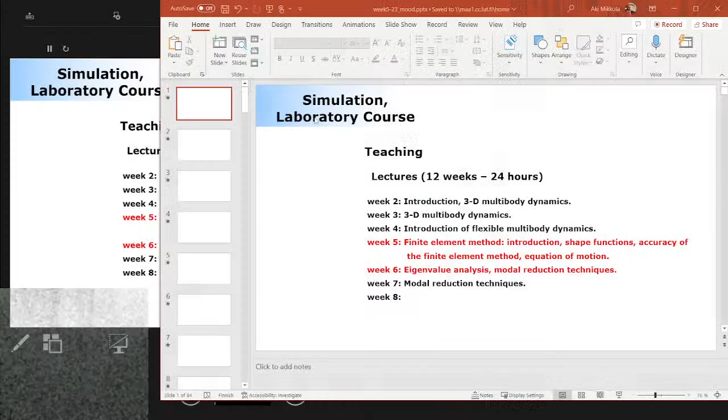This one. And then the presentation mode, like this. Correct, it's beautiful. And the writing and everything is okay.

Okay, what about sound? 5 second latency. No, it's okay, I think it is. What? It was there, it was there just a little while ago. Okay, this one. Look at this. No, I think it looks okay. I think it is okay.

So if you've been wondering why my face is so big, that's simply because I lost this extension cable between my computer and the camera. So that's why the camera needs to be so close to me. So my apology, my apology that my face is too big.

Yep, like this. Okay, what's going to happen today is that we will get started by explaining what's going to happen next week, because next week is a special week, an exam week. So we have a midterm exam, and how the midterm exam will be organized.

That's where we're going to get started. Because Mustafa and Suraj are such pleasant guys - I'm not, but these guys are so nice - they proposed to me that we be relaxed and try to serve our students as well as possible, and make this exam open for a full week's time. I was very much against it, like no, no, no, I don't want that. I want an oral exam in one particular time. I want to make your life miserable and all that.

But they fought back, and eventually they convinced me to have a written exam open for a full week. That's going to be next week. You have 5 questions, and each of the questions you already know, since those are the ones introduced in the slides. There will be nothing outside of those questions that I already mentioned.

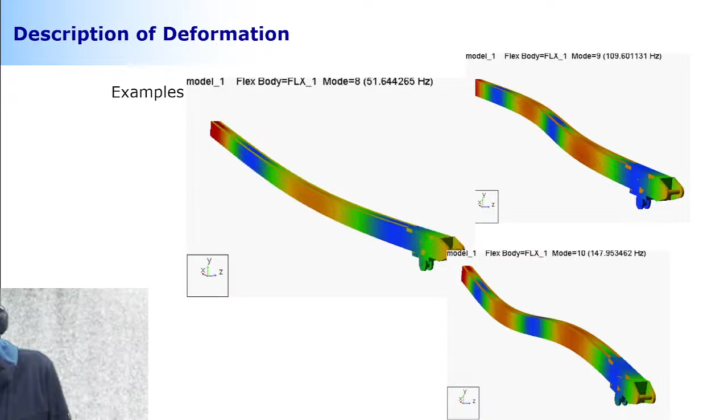And what are those questions? Okay, now I need to scroll down seriously. You need to close your eyes because you are not allowed to see what's happened in class quizzes and so on and so forth. Don't look, don't look. Close your eyes. Close your eyes. No, they cannot.

Okay, there. The online exam consists of 5 questions. Out of a total of 20 something questions, 5 will be randomly selected for you. So if you're following what your fellow student is doing, you will not possibly get the same questions. It's lottery based, and you never know.

But the way you can practice for this exam is to please take a look at all the questions. And there is this instruction that some of these questions are more important than others.

So we will, yeah, see you later Mustafa, so we will try to emphasize those more important ones. The chances that you will see those more important questions will be higher than the lower ranked ones. But be prepared to answer all the questions because you never know how the lottery goes in your case.

So you have 2 hours time. What do you think, is 2 hours enough? What do you think, Suraj? So it could be 3 hours. Yeah, we can make it 3 hours. 3 hours, okay, 3 hours, and then that's it.

You have a full week's time to do it, so it will be open Monday morning at 0:05, and it will be closed on Sunday just before midnight. I think it is a high risk to start doing the exam just before midnight, so make sure you have at least 3 hours.

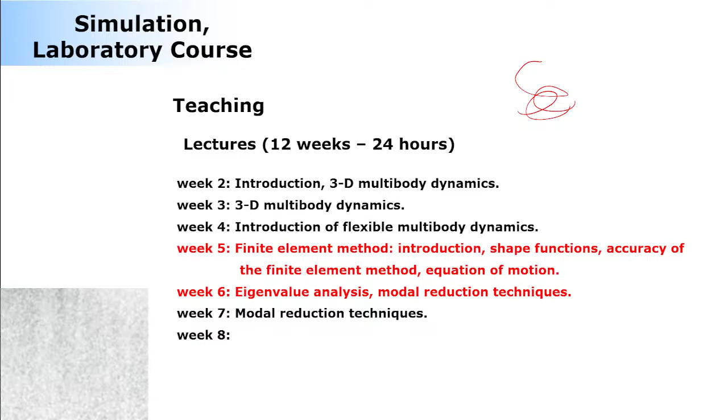I'm going to close the explanation about finite element modeling—thank you, Suraj—and I just need to see the comments from the online participants. Okay, no real comments.

So we're going to close the case about finite element modeling, and then start looking at ways we can reduce the size of a finite element model. That will be based on modal reduction, moving from one space, called nodal space or nodal degrees of freedom, to another space called modal degrees of freedom.

Can you recognize the difference? Nodal, modal. Because I have an accent, so maybe it's not so clear. Can you recognize nodal, modal? Because they're completely different story.

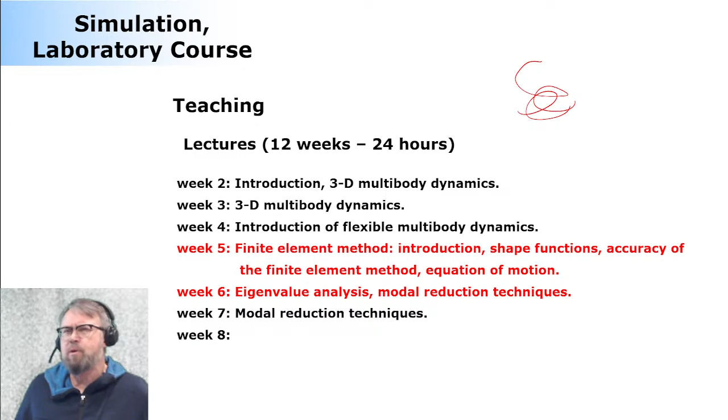All right, and that is related to this eigenvalue analysis and modal reduction technique. It's something that is a really, really important piece of information that I would like to explain to you.

But prior to that, what we looked at a week ago was three-dimensional multi-body system dynamics. We discussed the inertia forces that consist of a mass matrix and quadratic velocity vector. And something we found useful was that the inertia tensor, that is this guy here,

can be mapped to any rotational parameters you want by using this magic T matrix. So even if you decided to use 4 rotational parameters, that's okay. There's no need to express the inertia properties using these 4 parameters, but you can use a body reference coordinate system, and that's what helps your life a lot. Once you get the inertia tensor, that can be mapped to any set of unknowns you want with help of the T matrix. That's it, that's the message I'd like to deliver.

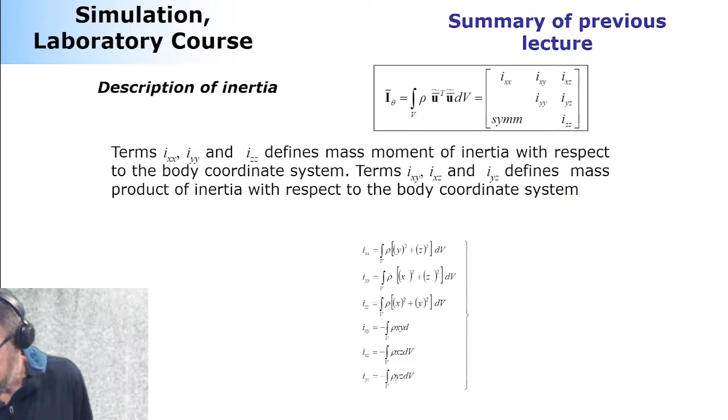And this is the details of the inertia tensor. So mass moment of inertia, mass product of inertia, so not big surprises there.

Okay, all right, so this technique about the lumped mass approach is an extension from rigid bodies. So what you do in this approach is take one single rigid body, divide your rigid body into a number of rigid bodies. Between these rigid bodies, you introduce spring elements. And that's going to be your way to model flexible bodies.

Problem is this numerical stiffness. And numerical stiffness means there are high frequencies and low frequencies simultaneously in one model. Remember what's the problem there?

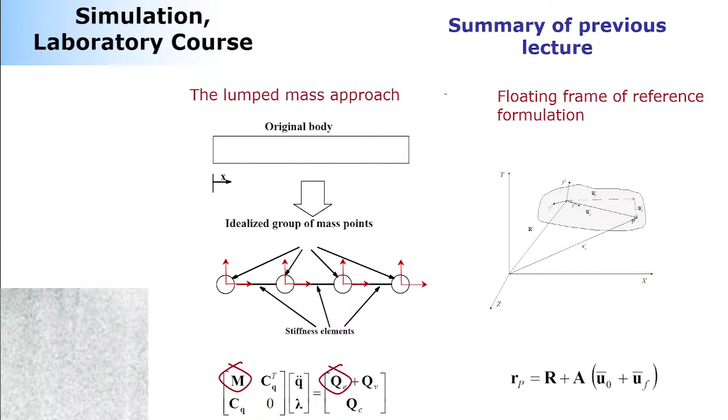The problem is this. Because last time I was unable to make any drawings, so I'm going to make this drawing for you. If you think about that, there is a force with a high frequency acting like this, and the response will be a combination of bending and axial direction. You agree with that?

In the axial direction, the high frequency is much higher than the bending direction, particularly if I make this structure very long and slender like this, all right? And then I'm going to have a component here and a component here.

Now what's going to happen to the response is this. This is time, and this is my response. Let's say this is a displacement u here, which is a combination of x and y, so the response looks like this. But if you take a close look at the response, take this line here, look closely what happens here,

and make a magnification like this back here. You see how I need to make a magnification here because I'm blocking the view. So this is the magnification. You look at the response, it's like this.

High frequencies, which typically are not important for us. But the integration scheme recognizes immediately, hey wait a minute, there's something high frequency happening in my model, and it tunes its steps to make sure it can capture something that we actually don't care about at all. We don't care about this. But the time step will be minimized, will be very small because of this behavior, and then the computation becomes slow. That's a problem, and that's where you have this.

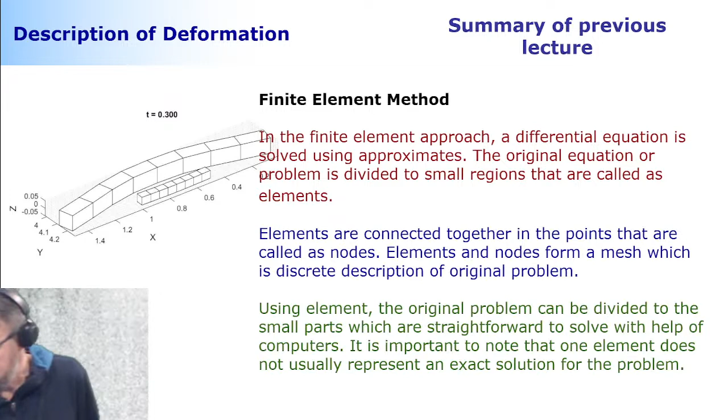Well, easiest, it can be estimated by using a polynomial expansion. Polynomial, which is based on the number of degrees of freedom and the type of element you're dealing with. Now we'll look at this funny spring element. This is very much in motion.

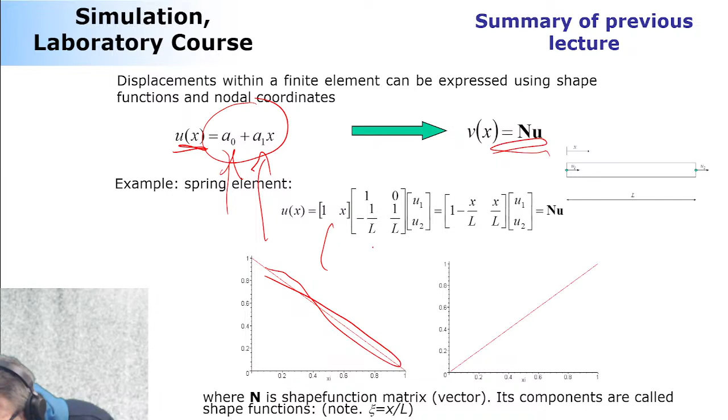Now, what it means in the case of this spring element is that if you introduce displacement to one end, the other node follows using this linear path, linear curve. This is not very illustrative because it's a kind of planar representation - even this is a line representation. But let's say that if originally your element has this length and you compress it to this length, this tells you how the particles between the endpoints are moving. That's what it's doing for you.

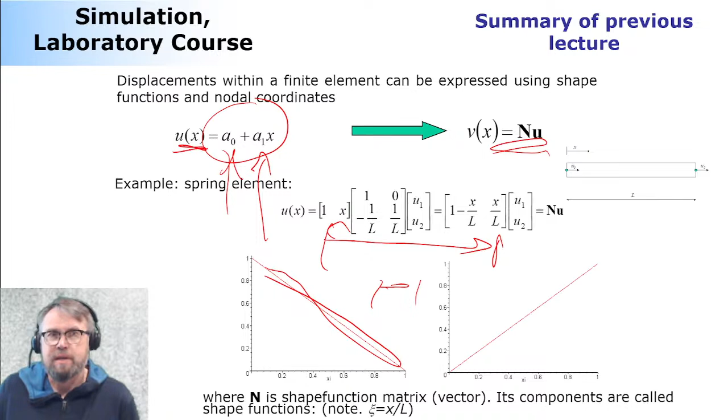All right, and then using this information, we can construct a stiffness matrix, and that came with the help of this kinematic matrix that defines the relationship between strain and displacement. And that's it - very mechanical. The rest is very mechanical. Only thing where you need to do a little bit of thinking is the polynomial expansion. Everything after that is mechanical - nothing else, no thinking, just doing.

And then we can get the stiffness matrix and external applied forces. So this is elastic forces, stiffness multiplied by displacement. And this is externally applied forces that is divided into nodal degrees of freedom, because force needs to be expressed in terms of nodal degrees of freedom. Why? Because in this equation, the unknowns are nodal degrees of freedom, so you need to make them match.

Of course, in reality, they could be distributed forces, and distributed forces are accounted for by using these volume integrals and shape functions, how the forces are divided.

Now, what we do in finite element modeling is solve this by inverting the stiffness matrix and multiplying external applied forces with the inverted stiffness matrix. Then we can get these displacements, but because we also have these shape functions, we can tell how each point of the structure is behaving, how they are moving, how is their displacement. But typically, only nodal degrees of freedom are displayed.

But when you think about the stresses, when you print out the stresses and strains, you actually need to know each particle in your system. And that's when you're using, again, these shape function matrices. Okay, that's it.

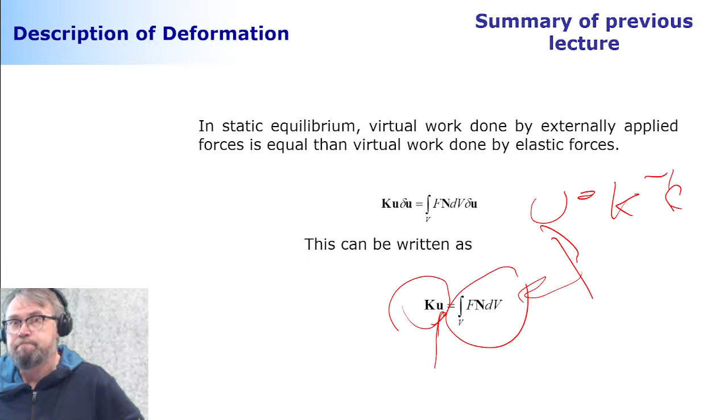Pretty clear. Okay, let's take a look at another example. So I have here a beam element. Now, the beam element consists of a total of 4 degrees of freedom. And now I'm looking at the displacement only in the transverse direction - only displacement in the v direction, this direction, nothing else.

I have degrees of freedom such that at this point there is a displacement in the global y direction, the v direction, that is noted here. Then there is a rotation at the same point, and same degrees of freedom at the other end. So a total of 4 degrees of freedom.

4 degrees of freedom. And now, because it's all about how the displacement is in this transverse direction, I can use a polynomial expansion with the 4 unknowns.

How can I select it? I'm going to go back to Pascal's triangle, and I'm going to select the components in a way that I take this A0, A1, and the rest I can select however I want. I can take it in a line, or I can skip some of them and make a non-conforming element.

That's all possible. But you just need to know that the used element is still converging, because some of these non-conforming elements are not converging to the right solution, which makes them have no use then, of course. Okay, now this is all about the center line.

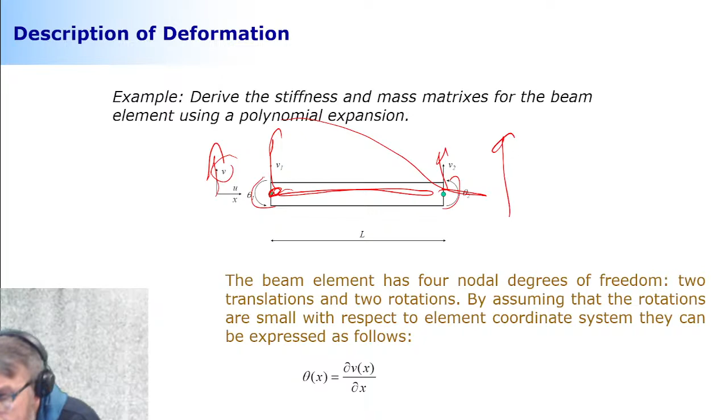So we're describing the center line all the time. But at the same time, we also know how each of the particles that are off from the center line are behaving. So if I have the center line here, I always know that particles off from the center line will be perpendicular to the center line.

And this is the type of element that is called the Bernoulli beam element. The Bernoulli beam element is unable to take transverse shear deformation into account. Transverse shear deformation is somewhat important, particularly if you have thick structures that you would like to analyze. And this assumption that the cross-section always remains perpendicular is unable to capture the transverse shear deformation.

You know this story already. Okay, meaning that if I have here a cross section, it's again perpendicular. The further off I go across this center line, the more bending strain I'm going to get. So my bending and transverse deformation are combined like this.

So they are simple, like a partial differentiation. It's telling you what the angle is here. And the angle is like this tangential angle here. And something perpendicular to that is the cross section. Simple, like this. Okay? All right, so here's my polynomial expansion.

I have here a0 all the way to a3, and a3 is multiplied by x power 3. Look what I did: I took this directly from Pascal's triangle with no skipping. I took each of the components as they are in Pascal's triangle.

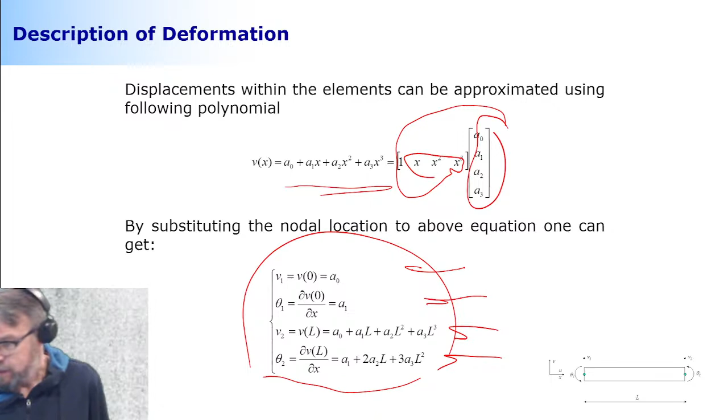So once I introduce this information, I get a total of 4 equations. How many unknowns do I have? 4. So this is solvable. So I can extract the information like this.

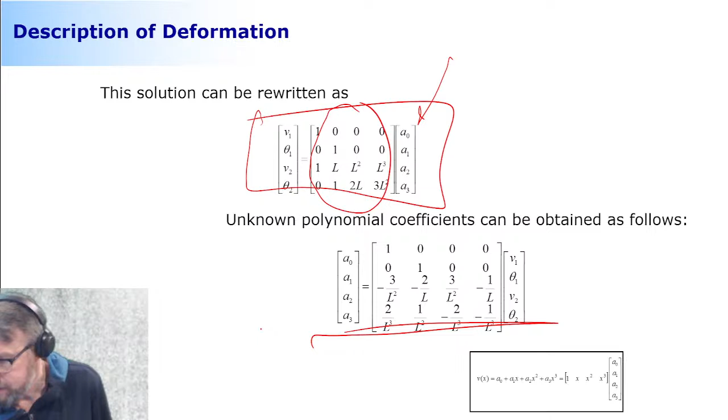This is the previous equation, but this time expressed using matrices and vectors, right? I'm going to take this guy in the middle, invert it, and I can solve this. And that's exactly what I did here. And the final thing is the substitution, after which this is how the shape functions look like.

Now the shape functions have this special feature that they are orthogonal. That means they are not a combination of each other, but they are independent bodies. Independent bodies in a way that if I take a look at this shape function, it's representing what happens if I introduce the displacement in the y direction.

You know, look at that. So I'm introducing the displacement in the y direction. Keep in mind what the rest of the 3 degrees of freedom are. There's rotation, and rotation here is 0. Displacement here is 0, as is the rotation. So no other degree of freedom is imposed or non-zero, other than the one where the shape function is affecting you. Nothing else.

So we're okay, very good, very good. I wasn't sure, but we are okay. You're with me? Okay, good.

All right, and then this is a rotation. So when I introduce the rotation, displacement here is 0, rotation here is 0, as is the displacement. And same for the other end. So that's how it goes.

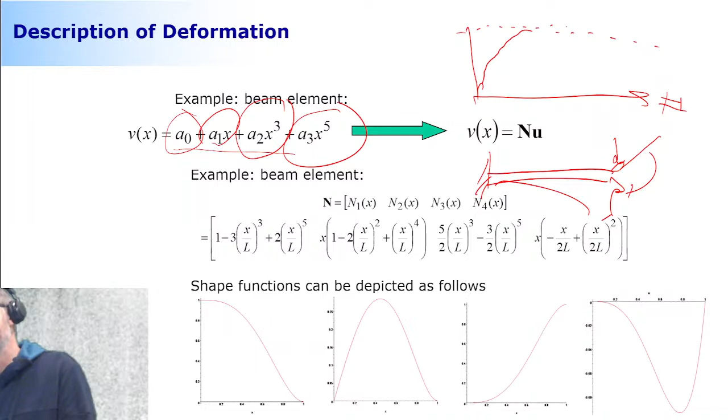This is an inherent feature of the finite element method: you're getting closer and closer to the actual solution, but never necessarily a one-to-one match. So when you look at the 10th digit, that may be a little off, but who cares? What difference does it make? It makes no difference. So it's not necessarily absolutely correct, but it's a very, very good estimation. That's the nature of the finite element method. And you get a better estimation with more elements. How fast you can get the good estimation is called convergence rate.

Good convergence rate means that a low number of elements is able to produce very accurate results. And why is this important? Because then you can save some computational power.

Okay, this is off topic, and I don't know why I'm explaining this to you, but I still will. In the finite element community, this displacement-based finite element community, what we're looking at the moment, the unknowns are displacement. There are many other types of finite elements where the unknowns are not displacement, but pressures or something else, which we are not going to take a look at here. But for this displacement-based finite element method, there are two ways we can do this convergence.

We can either improve or increase the number of elements, like I explained. You put more smaller and smaller elements to fill the same structure, and you get better and better solution. Or you can increase the order of your element. The order of the element means you're adding maybe internal nodes to your element, adding more complicated degrees of freedom to your structure.

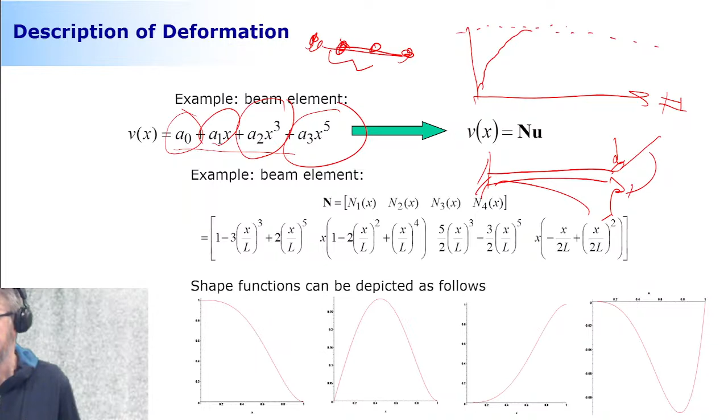HP refinement has two alternatives: increasing the number of elements, or increasing the complexity within the elements. Usually, when you use a commercial finite element method, it's all about increasing the number of elements. But now you know there is this alternative, so you can show off next time you discuss with... I don't know.

So for comparison's sake, this is how they look different - these are the shape functions. Again, finite element method is all about this: nothing but how the behavior is between the nodes, nothing else. Once we know the behavior between the nodes, using this mechanical computing, we can get the stiffness matrix and the mass matrix. Makes sense?

Comments, questions? All makes sense, always. So you knew this already a million years ago, more or less. Okay, what about our finite element people? You were aware of these P and H refinements. You knew that too. You knew that too. You're lying, you knew that.

More or less, okay, very nice, very nice. What about the mixed finite element, when there's displacement and pressures simultaneously as unknowns? Yes, sir. Correct. Newton method or Gaussian elimination method? So where exactly - I think at where you're using this nodal matrices, or so, what exactly do you do with your Newton method?

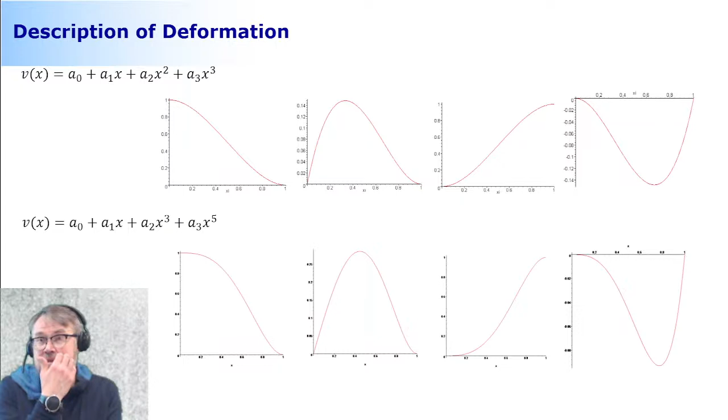Because lump masses never introduce rotational degrees of freedom. That needs further explanation, but rotational degrees of freedom are ignored. That's why when you use lump masses with beam elements, they're in a straight line - they don't have rotational inertia. So if you take hold of this beam structure and rotate it like this, it's going to go crazy because there's missing inertia. The spinning speed will be velocity of light, which is not realistic, simply because it's missing rotational inertia. So rotational degrees of freedom are ignored.

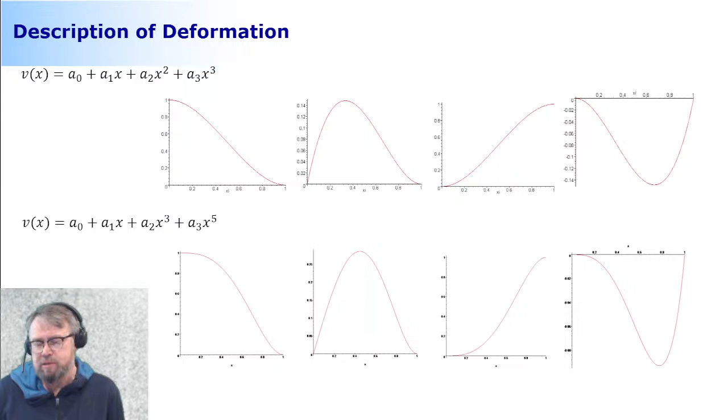But this is a translational degrees of freedom - you are not introducing any inertia whatsoever in that method. But there are other ways, alternatives to express it. So that's why.

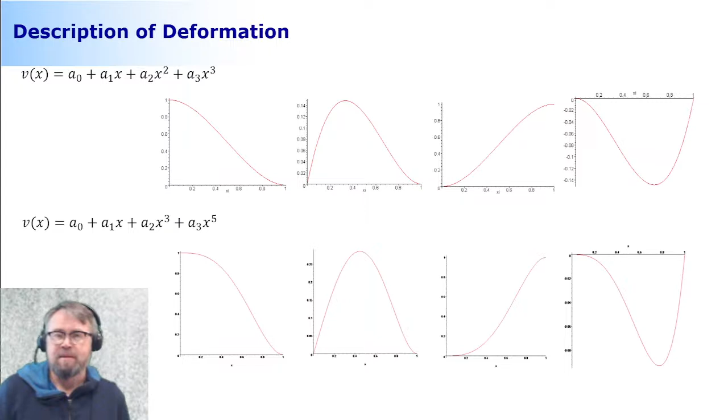You know that's a joke we have - B defines the strain displacement relationship. No clear interpretation - is it on or is it not yet on? It's on. Okay, very good. So we'll get back to that momentarily.

You see the in-class quiz. Team Malaysia voting for... no votes. You passed the vote. We're voting because this is ultra democracy in this classroom - we're all forced to vote. D, meaning no clear interpretation. So Team Malaysia thinks no clear interpretation. All right, we're moving on, and I'll get back to that momentarily.

Okay, now a short story - I'm going to speed up a bit because, as I said, the finite-element method is all about these polynomials. The rest is mechanical. We're going to find a relation between the displacement outside of this midline, and that, of course, is this cross section and how far off you go from the cross section. That's why the y is there. Further off you go from the cross section, the bigger your displacement.

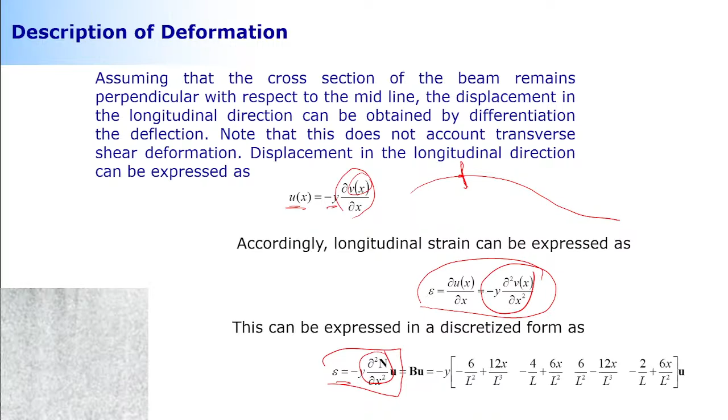Using this information, I can take my previous slide and substitute that here, and that's how I get this equation - this is my strain-displacement relationship. But again, no thinking needed really, because this is very mechanical. Now you get this B, which is a kinematic matrix, and once you have a kinematic matrix, you can get the stiffness matrix. Please do not think, just do it.

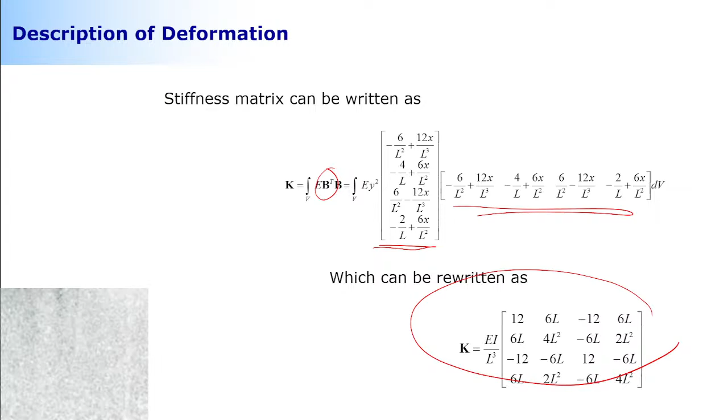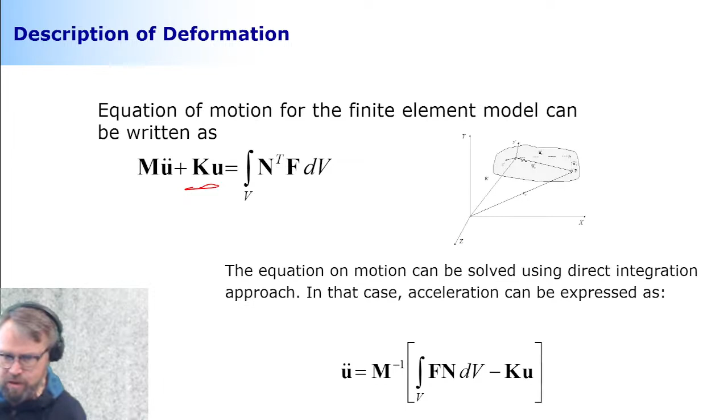All right, remember where we started. We started from the polynomial expansion, so then we were able to get the stiffness matrix and the mass matrix. Once we have the entire structure, we can combine these element stiffness matrices into a system stiffness matrix. This is something I need to show you a slide next week, how you do it, but basically you're overlapping your degrees of freedom in your system stiffness matrix. If you have two spring elements, this is element number 1, this is element number 2, each has a 2x2 stiffness matrix.

This system consists of 3 degrees of freedom. So how can you construct, from this 2x2 and this 2x2, the system matrix that is 3x3? By overlapping them. There will be a submatrix which is 2x2, and another submatrix which is 2x2, and they're overlapping here, sharing the degrees of freedom in the location that they're actually sharing them in physical life too. These components will be summing up, and that's how you construct the entire stiffness matrix for your system.

Remember what we did in multi-body system dynamics was a block diagonal representation. It was like if there would be a 2x2 matrix, then another 2x2 matrix constructed in a way that they never share any degrees of freedom whatsoever, just a block diagonal representation. Here, they are overlapping, and because of this overlapping, I have this one joint node shared between element 1 and element 2. That's how the finite element method works.

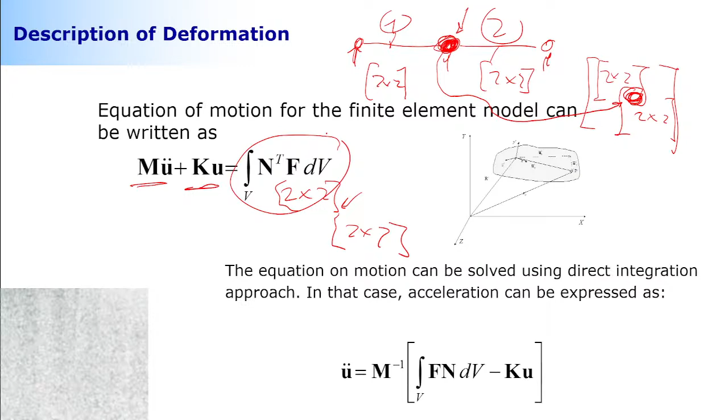You can do the same for the stiffness matrix, and this is how you extract your external applied forces. Now you're ready - this is your equation of motion for a flexible body described using the finite element method. What you can do then is solve for acceleration, as shown here, and then you integrate acceleration to get velocity, and integrate velocity to get position. That's what we were after, okay?

But there is a big problem here. The typical finite element model consists of thousands, tens of thousands, hundreds of thousands of degrees of freedom. That's not good because this equation needs to be solved every single time step, and the time step we're using in multi-body system dynamics is a millisecond or 10 milliseconds - sometimes 10, but often 1 millisecond. That's too much computing, so we just cannot do that. We need to do something else, and we need to reduce the size of our finite element problem by moving from nodal degrees of freedom to modal degrees of freedom.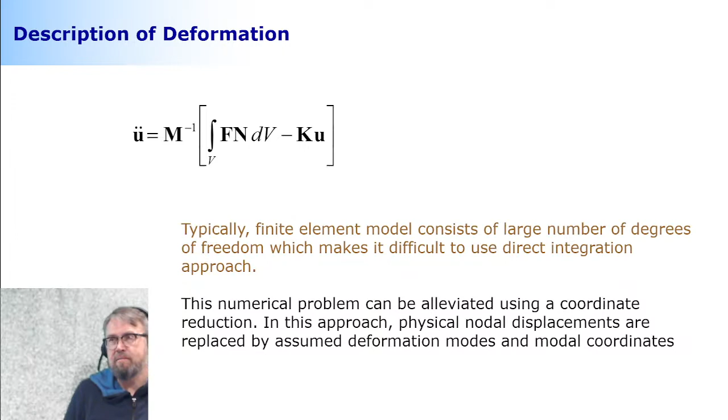Here's the same story explained. This is not the good way to go because it's too much computing for us, particularly when we look at the reference motion, rigid body motion - if we cut corners, it's described by using 6 variables. Now suddenly we have 6 plus 100,000; they don't match, they don't get along. One is too big, and we need to make it smaller - that's going to be our mission. So our mission is to make the finite element model smaller, to make it comparable with the 6 unknowns we're using in multi-body system dynamics, 3 unknowns if it's a planar case.

And what we're going to do is this magic: we're moving from one space to another space, and something that comes with phi is assumed deformation modes. So we are assuming not just one element anymore, but the entire structure's behavior, expressed by using this matrix here. So the matrix consists of columns.

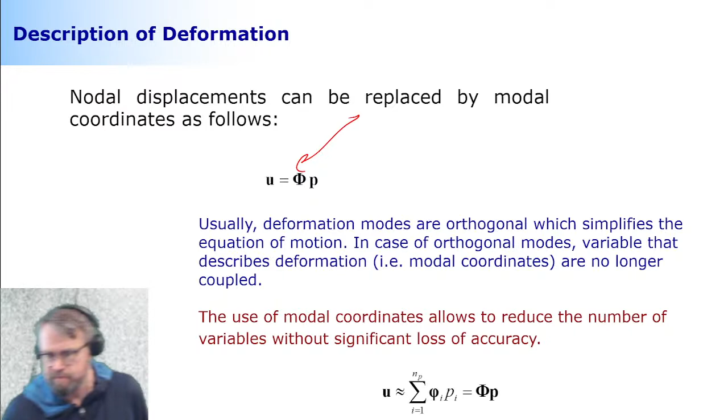Each of these columns represents numerically one possible deformation way. One possible deformation, which is not a single element, but each of the nodal degrees of freedom, each of the elements in your system, meaning the entire structure. How much that is affecting your solution, this deformation mode, that's going to be our new unknown, which is called modal coordinates. I'm going to explain this again in a second. A finite element model consisting of 10 degrees of freedom means there are 10 different ways that the finite element model can deform. All right? So those are the different ways.

If we keep all these ways in our computing, we lose nothing. But some of these ways may not be important for us, particularly if you think about a finite element model that consists of 100,000 degrees of freedom. How many different ways can the structure deform then? That's 100,000. Maybe not all of these 100,000 ways is equally important, but some of them are more important than others.

And now we just need to find the king. We need to find the king and the queen. Once we know the king and the queen and their child, their family, we need to look at them and leave the rest of the crowd with no attention. That's not democracy, this is ultra opposite to democracy. Okay, you're following my reasoning here. So we need to find the most valuable ones and leave the rest with no attention whatsoever. We actually kick them out from the game. When we kick them out from the game, we've reduced the problem size. Okay, that's what we're going to do.

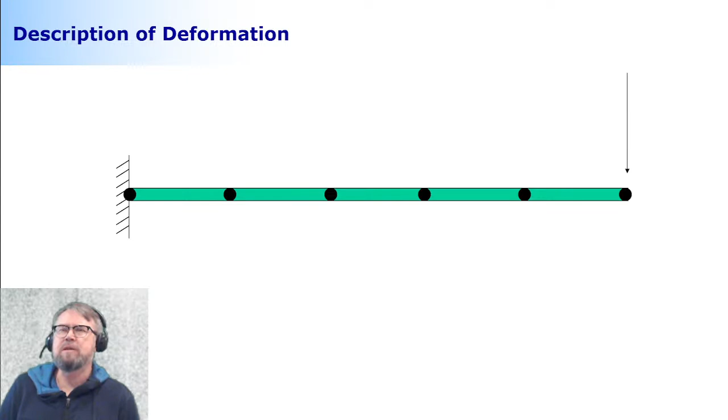Let me try to explain this whole story about the modal degrees of freedom one more time. This is a cantilever structure, and this cantilever structure is modeled using these finite element beam elements that we looked at a little while ago. So each of these nodes that are black in color consist of 2 degrees of freedom. This is 2 degrees of freedom in the sense that there is a displacement in this direction and rotation, except that there is not. And why not?

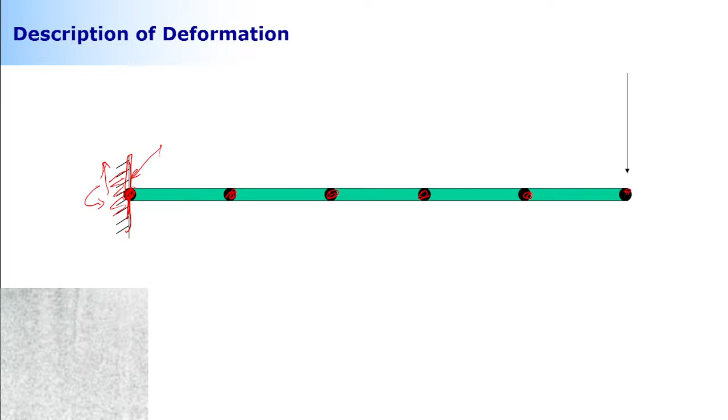Because this node is here connected to ground, so the degrees of freedom are taken away. So this is not a possible deformation. But then comes next: this guy has a deformation in this direction and rotation, as does this one, and this one, and this one. So there's 1, 2, 3, 4, 5 nodes, other than the boundary nodes. Each of them has 2 degrees of freedom. So how many degrees of freedom in total? 10. 10 degrees of freedom.

10 degrees of freedom, and each of these 10 degrees of freedom means something. They mean how one single point within the structure will deform. All right? How can we get these 10 unknowns—we can get these by solving the finite element solution, a static solution like this. So these 10 unknowns are these guys, these nodes. All right? So we're solving this equation by inverting the stiffness matrix. So we get each of these points, how they are performing, how they are moving and translating. So it's going to look something like this.

All right. What we can do, instead of looking at these points—and now we really get these 10 unknowns, so this vector will consist of 10 components—what we could do instead is make an assumption that most probably the way the structure can deform will be the lowest, how it is rotating or vibrating in this lowest natural frequency. In the lowest natural frequency, it is deforming like this, something like this, something like that. But how much like that? I don't know.

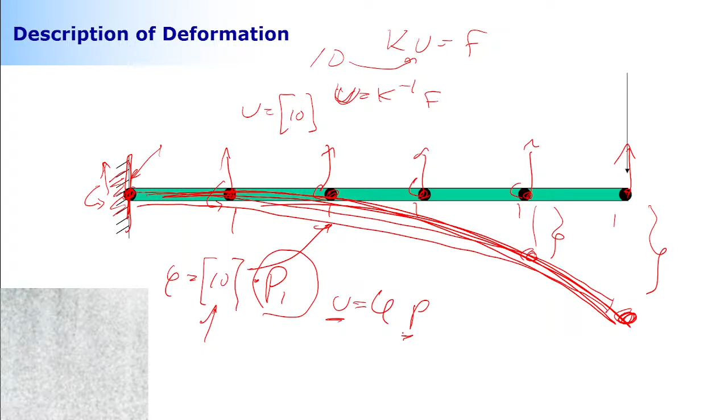If I put it like this: one deformation mode multiplied by one amplification, that's going to give the vector of nodal degrees of freedom. So I can move from nodal degrees of freedom, or nodal space, to modal space with the help of the assumed deformation mode. That's what I'm going to do.

So later I can use these as my unknowns. Now if I look at my structure, I can have 10 of these. This was ID number 1, this is ID number 2, it goes all the way to ID number 10. But maybe this 10 is something I can ignore without significant loss of accuracy.

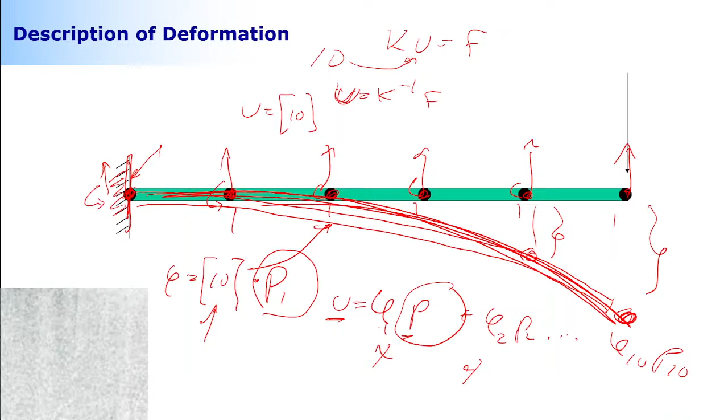That's exactly what I'm about to do here. I'm going to select the ones contributing the most, the most valuable players - that's what they call it in NHL. So I'm picking up the most valuable players from each of the teams, and ignoring the rest. I don't care about the rest. Okay, that's what I'm doing.

How can I get these deformation modes? I can get these deformation modes from an eigenvalue analysis. Eigenvalue analysis is not an absolute value, but a way the structure can deform. It is highlighting the ways the structure can deform, nothing else.

How can I conduct an eigenvalue analysis for a finite element model? Well, first I need to ignore external applied forces, because this is not about the responses. This is about an inherent feature of the structure, not a response. A feature, not a response. Okay?

You know that eigenvalue is all about the relation between stiffness and mass. Stiffness and mass - those are the two pieces of information I have here: my inertial forces and my elastic forces, my mass and stiffness. Now, for the math, I know that the solution for this problem can be expressed like this.

I don't know where the heck this is coming from, and I'm not planning to find it out for you. But if you want to go through it yourself, you can see where it comes from. This is the Euler method. This is what you learned at bachelor level. So this is the solution for this problem.

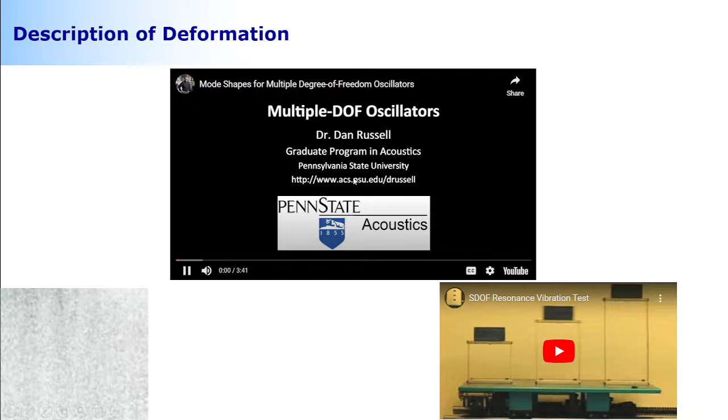Okay, let's take a look at the animations and then we get back to this. You know these stories, these YouTube videos about simply supported beams. A one degree of freedom system.

So in the one degree of freedom system, how many natural frequencies are you going to find? One. How many corresponding deformation modes? One. So it's like this, simple like this: one deformation mode, one frequency. If you have two masses, how many frequencies are you going to find? Two. How many different modes? Two. This is your two-degree-of-freedom system.

This is the first way it can deform. The second way it can deform will be shown momentarily. Where is it now? This is a slow video.

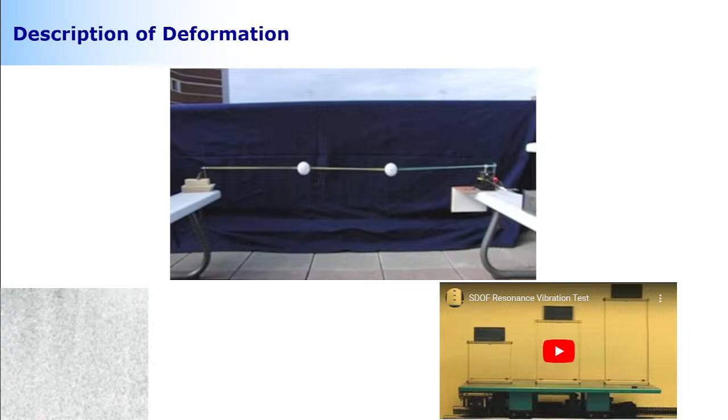Okay, 3 degrees of freedom, how many different ways can it deform? Not 5, that's incorrect. Israel, you said 5, it's not 5. It's 3, of course. Sorry for making jokes about you.

Okay, so 3, this is the first way. How many other ways? 2 more ways. Simple, like this. And this is the natural frequency.

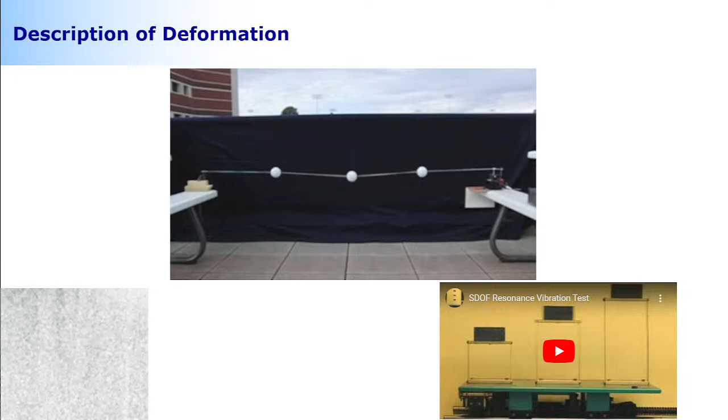That means that if you excite your structure using the same frequency, the natural frequency, your structure will go crazy. It will start vibrating like no limit, but there will be a limit. Like every system, they have a physical limit, but mathematically the response will go to infinite in the longer time perspective. So it's going to vibrate to the moon and back, and then soon it's going to be more. But that's not going to happen in real life because there are always some limitations. These are the natural frequencies.

So the structure is moving such that I'm increasing the motion of the platform slowly. What's going to happen first is that the structure that is the most slender, the one on the right side, started to vibrate because I'm going to hit its natural frequency. And the vibration goes crazy.

Okay, this is a kind of slow video. I guess these are like Feng Shui videos, they're so slow that you can practice your mental strength.

Oh, here, finally. Look at the guy on the right, he's going crazy. No, the one in the middle, I don't know where we are at. No, I think it's still the right side that's going crazy because we're exciting the platform using its natural frequency. Now look at that, so it's going absolutely crazy while the others are moving nowhere because of the natural frequency.

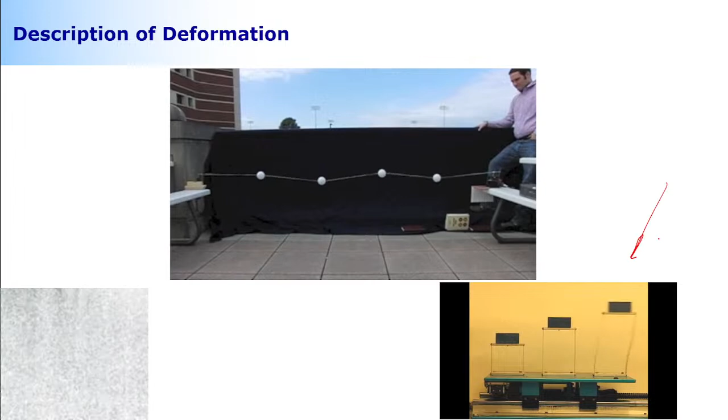That's the eigenvalue analysis, so we can first find it out. No, look at that. So this is the first eigenvalue, then eigenvector. Makes sense.

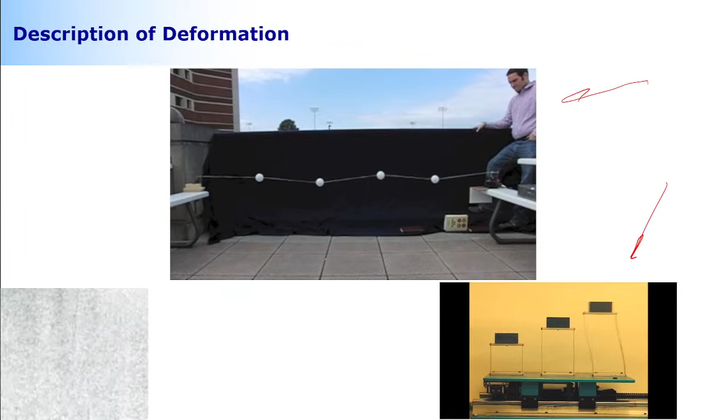All right, so then the second one will go equally crazy, but soon this will calm down because we're going to go away from the natural frequency. Look, so it started to calm down as the second one goes crazy. Okay, and so on and so forth.

So let me take myself back here. Now, this eigenvalue analysis is going to give you an equal amount of eigenvalues and eigenvectors as the number of nodal degrees of freedom, the number of unknowns, not more, not less. In the maximum case, usually you're not really interested in all of them, but the maximum number will be the number of nodal degrees of freedom, unknowns.

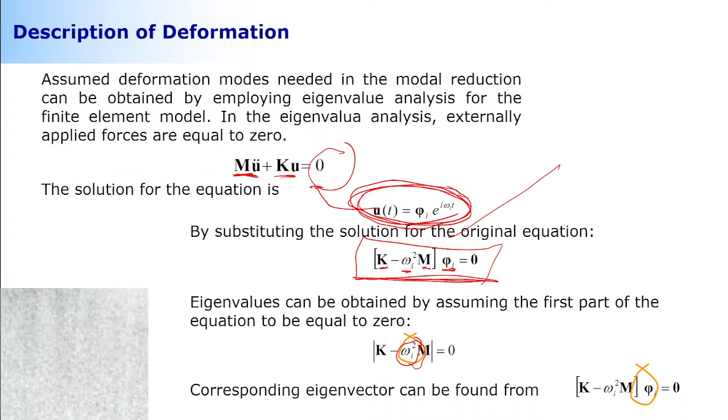Okay, with that, here's my question to you. I have here a finite element model that consists of m number of elements, n degrees of freedom. The model can be used to solve how many eigenvalues, how many different natural frequencies? Is it equal to the number of elements, equal to the number of nodal degrees of freedom? Are these two numbers subtracted from each other, or are these two numbers added to each other? So which one is correct?

What is team Malaysia saying? Okay, team Malaysia is saying B. Okay. So it's not open.

Yep, okay, success rate competition. 18, 80? No, okay, so it is 80%. Oh, I can write this, 80%. I'm guessing 95, 90. Okay, what about 100? No. Okay, the success rate is this one. Very low, very low. Major disappointment.

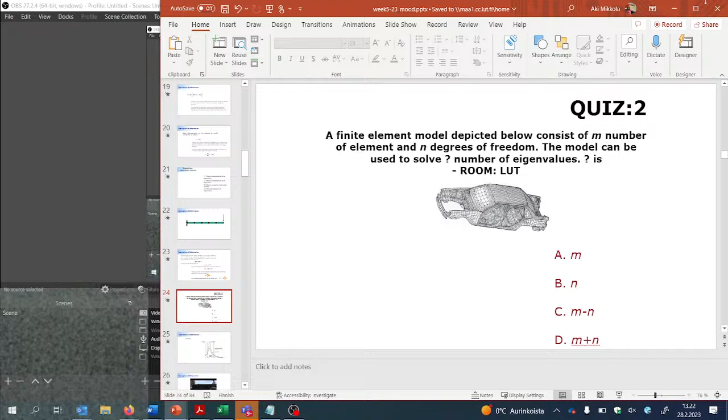Okay, all right. So then, taking myself back here. Oh, now you don't see this. Hold on.

Okay, that looks good. All right, then I need to show you something.

So this is a finite element model describing a tube roll. When we started to look at the natural frequencies and the corresponding deformation modes, the lowest ones look like this - they look like a banana, something obvious.

But soon when we started to look at this one here, pay attention to this frequency - now the frequency is 200 hertz. Most of the modes are still important; they still make a contribution to dynamics.

But as soon as we increase the natural frequency, the deformation modes become more and more exotic. Soon they will be so exotic that their role in the response may not be very important anymore. Of course, we're still in not so high frequencies - we're still at 350 something hertz, so it's not that great yet.

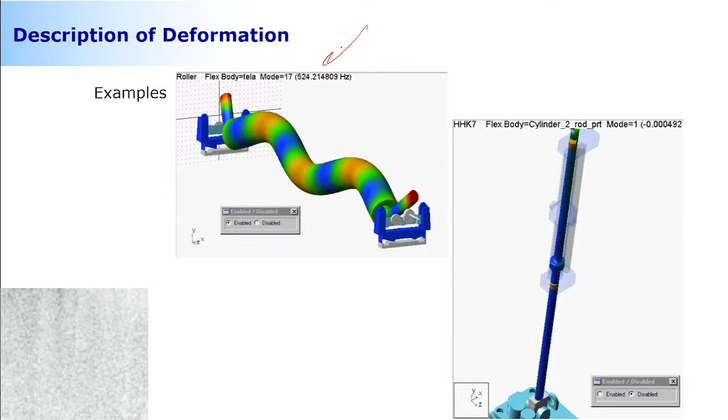But the more we go in this video, the higher frequencies we're going to meet, the more complicated deformation modes we're going to meet, and some of them are no longer important. That's the whole trick about modal reduction. The ones that are very detailed, very exotic, we simply ignore. We simply do not care about these exotic ones - we only want to see the most valuable players and nothing else.

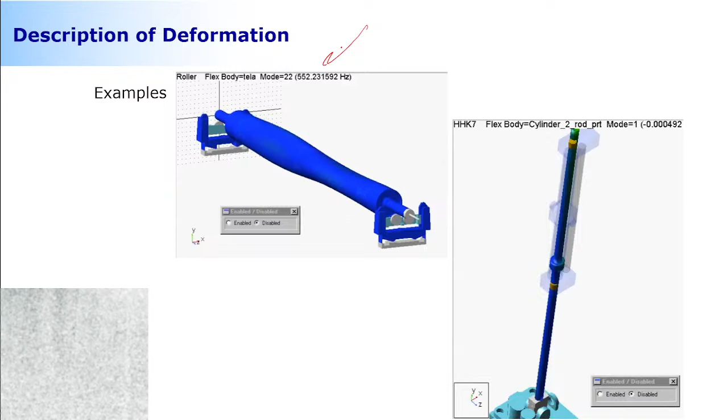This is already disabled, and the frequency becomes 500 hertz. Let me show you even more, something more exotic. These are the simple beam structure modes, which are at low frequencies for sure - they are important, it makes sense to keep this in your model, as is the case of this one.

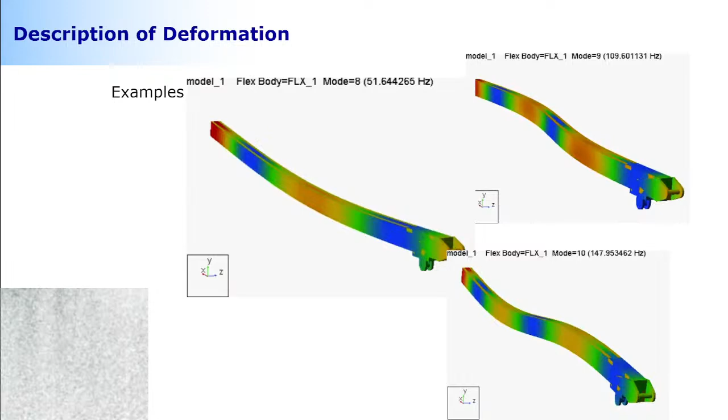And that's exactly what we do in the model reduction method. And then comes something beautiful. Many people, by the way, when they learn this, they start to cry - emotions run so high because this is a big magic in mechanical engineering.

And the big magic is this: these modes that we're looking at - if I'm going to write it like this, plus this, and so on, all the way to n - I'm going to construct a matrix, which is the matrix where these modes are arranged: this is the first row, second row, third row, and so on and so forth.

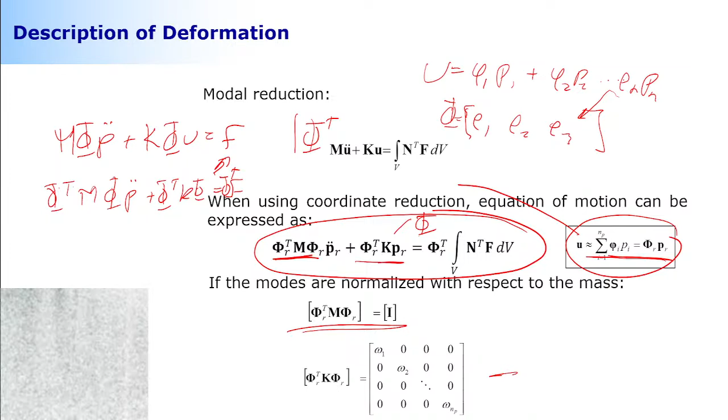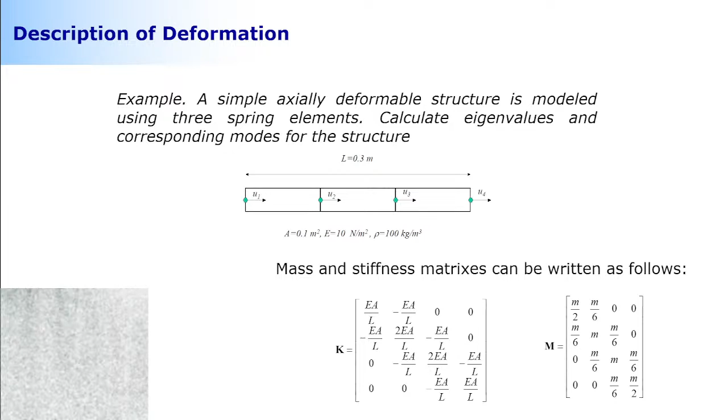Okay, let's practice this. I'm going to conduct an eigenvalue analysis on the structure shown here. This is the famous element we learned a week ago, which is only capable of moving the nodes left and right. I'm modeling the structure that consists of 1, 2, 3 spring elements, and there are 4 nodes: 1, 2, 3, 4. I'm going to conduct an eigenvalue analysis for this structure.

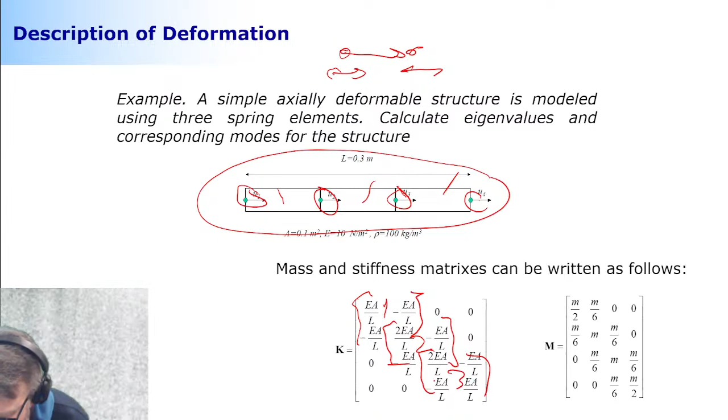First thing to do is take my 2 by 2 matrices and construct them into the system matrix like shown here. This is my first element, my second element which is connected to neighboring elements, and my third element. I'm doing the same for the mass matrix. Now I have the components I need: my mass and my stiffness.

I know that you don't do this in real life, but I wanted to show how you do it if you solve it analytically. In real life, you're using iterative processes like you learned in a finite element class, but I don't do that here because I want to show the exact numbers for you.

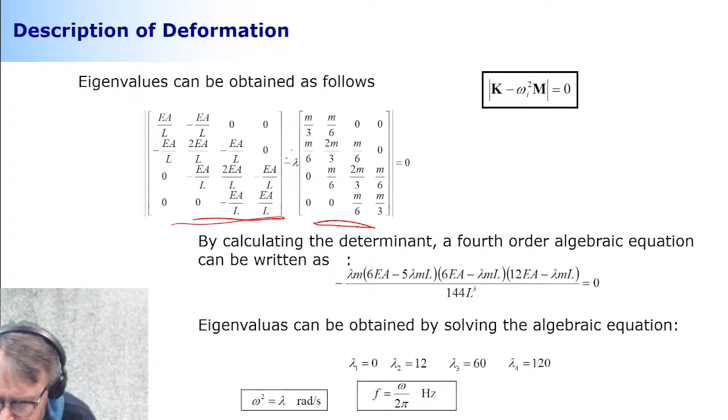Here is my stiffness, this is my mass. And look, this is what I called earlier omega squared, so now it's called lambda. I'm setting this equation equal to 0 and taking the determinant of this part of the equation. When I do that, I get the fourth order polynomial shown here. I know it's fourth order because there's a lambda here multiplied by this one, and this one, so it will be a fourth order polynomial.

I'm using my symbolic math tool to solve where this polynomial goes to 0. It goes to 0 in 4 different places: lambda equal to 0, lambda equal to 12, lambda equal to 60, and lambda equal to 120. These numbers are related to natural frequencies, so these are the natural frequencies of the structure.

Number 0 means what? What does this mean, number 0? Guess, you can guess. It's not vibrating, correct, but what does it look like? It's not vibrating, but seriously, you're saying rigid body mode. I've been asking this every year, year out. People are like, no idea. Never ever do they say rigid body mode. What's wrong with you people? So you said correctly, this is serious, this is very, very serious. How did you know that? Because machine dynamics.

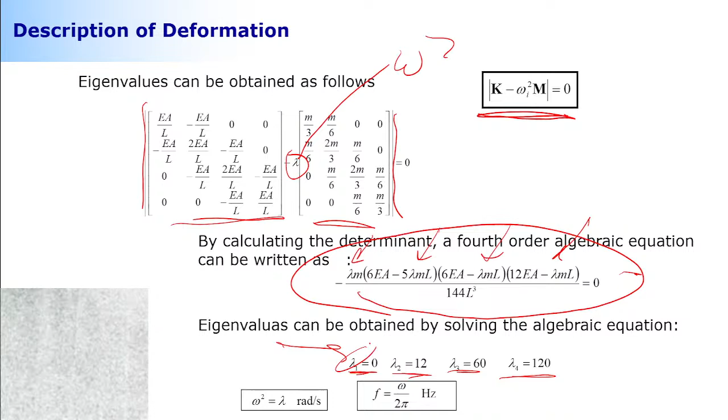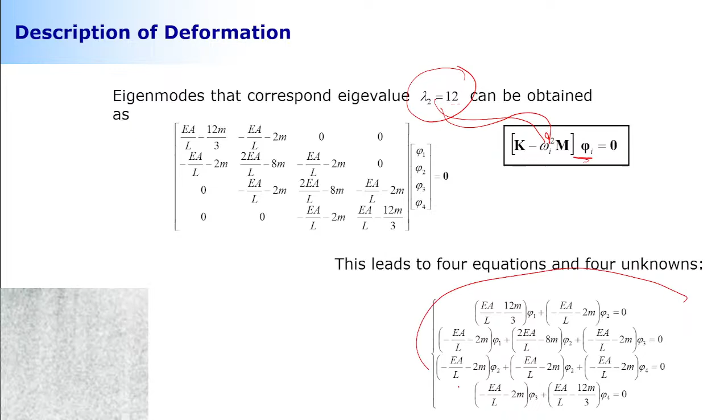What's going to happen next is I'm going to take one at a time of these natural frequencies and substitute them into this equation. I'm going to solve this vector, which is the eigenvector, the way the structure can deform. Lowest is the number 12. You don't need to care what that means. When I substitute the number 12 into this equation, I get this set of equations: 4 equations, 4 unknowns. When I'm solving the unknowns, they look like this.

Now, something extremely important to understand: this is not a response of any kind. Why? Because the equation that I'm solving is this.

This is my equation. To solve the responses, you need to know the feature of the structure, which is this one, and forces. But remember what I did in the beginning, I set the forces to be equal to 0. So I don't care about the forces because I only wanted to see the feature of the structure.

Now this number or this set of numbers can be multiplied by any scalar number you want, anything you want, and still it fulfills the equation. I can multiply this by 10, by 100, 1,000, 10,000, doesn't matter. It's still going to fulfill the equation because this is just the way the structure can deform. And this way can be amplified or not.

This multiplication is called scaling. Scaling means that you want to get your numbers to be as close as 1 as possible, because computers are very good with the number 1 and not as good with other numbers. Of course, they're okay with other numbers, but as soon as the number becomes very small or very large, they start struggling. So scaling is one thing that we can do.

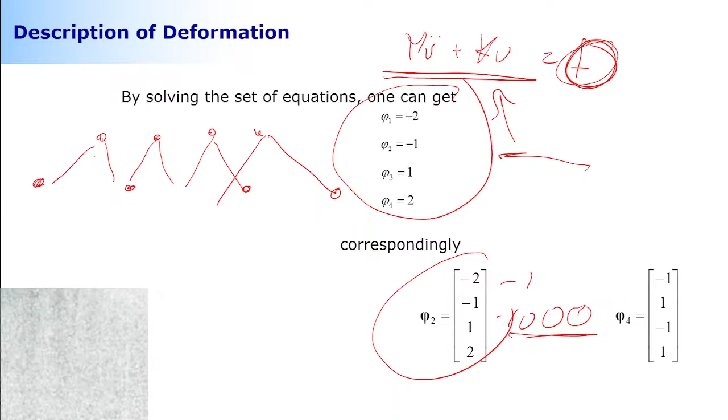Okay, now comes something very important, and I'm putting all my hope in you that you're going to get this correctly. So the physical interpretation of the eigenvector, this deformation mode, is what? Relative displacement of nodal degrees of freedom, meaning they only show the way the structure can deform. Absolute displacement, meaning you can use it in your analysis, you can measure what the response is. Or strain distribution within the structure, no clear interpretation. Only one is correct. Which one?

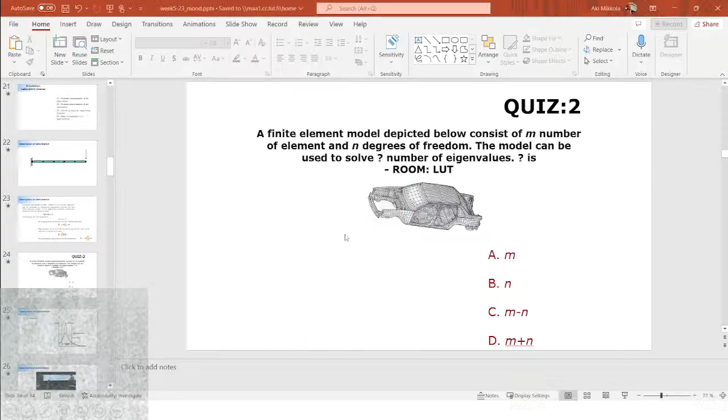And Team Malaysia is thinking heavily. So we're going to learn the solution. I need to go, I need to take myself back in as Socrative.

Where's Socrative here? Okay, now, relative, absolute. Relative, absolute, there's a big difference. Relative is the way the structure can deform. Absolute is something that you can use to measure the displacement and something you can use in your reasoning. Strain distribution: no comments. No clear interpretation: no comments either.

100%, 100%, and it would be beautiful. Okay, 100%, and I'm going to give each of you one extra point in the midterm exam. Correct, you heard me right, you heard me right. So one extra point, okay, now please communicate with your fellow student, please, and revote if needed.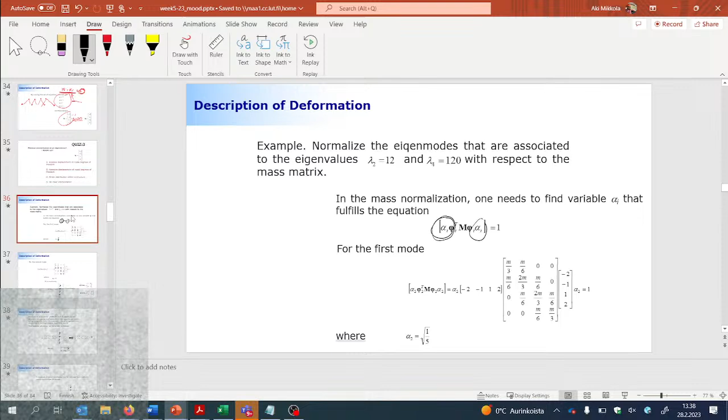And that is something that is called scaling. A better name for that is normalization. A typical normalization is called mass normalization, meaning you want the final mass matrix to become an identity matrix, a matrix where the diagonal components equal 1 and off-diagonal components equal 0. This is scaling, but again, it's something you can multiply these relative numbers by anything you want. So I'm scaling my mass to be a diagonal identity matrix, figuring out what this alpha, this extra multiplication number, must be so the solution is 1.

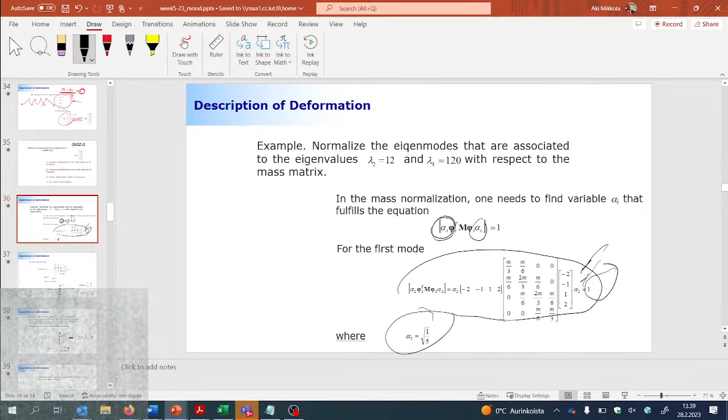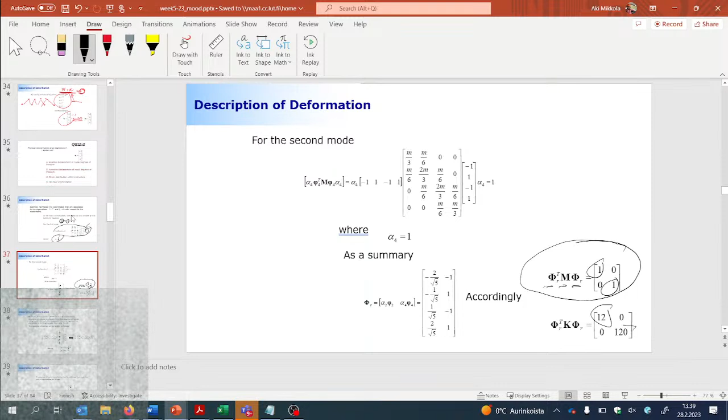So my unknown is this multiplication number, and I can solve it like I showed here, and I can solve it for other numbers too. When I then take my modes multiplied by the original mass matrix multiplied by modes, I'm going to get the identity matrix: the diagonal components are 1s, off-diagonal components are 0. And then when you do that, the eigenvalues appear as diagonal components in your stiffness matrix. That was my last slide.

Then I'm not going to discuss that further, but I'm going to move on to this one. So here's a summary of the questions.

Remember this? Suraj promised that the voting will be on. It's already on. Okay, voted. It's going to be closed, he said, Thursday at midnight. And then we announce how the results are. But this is the stuff.

These are the questions related to kinematics. I'm not going to read them anymore, but there are 11 questions in total, and a little bit about ranking, which makes sense for you to focus on. So the entire kinematics topic is worth 3 stars.

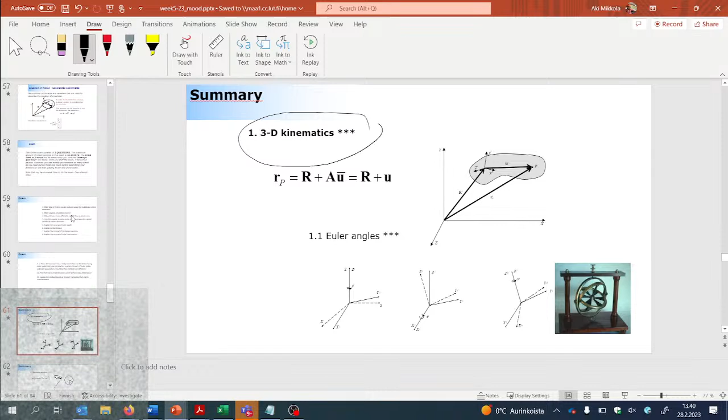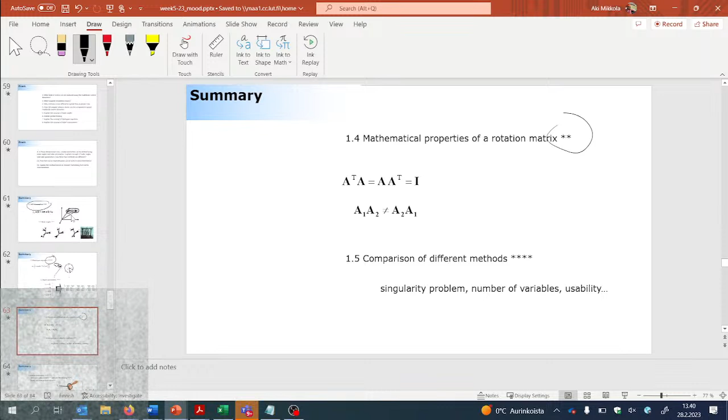Rodrigues equation, 5 stars, but there's not that many questions related to that, so it's not so complicated. Mathematical properties of rotation matrix, just 2 stars. Comparison of different methods, 4 stars. Robot kinematics, 4 stars, of medium importance. Denavit-Hartenberg is something we learned earlier.

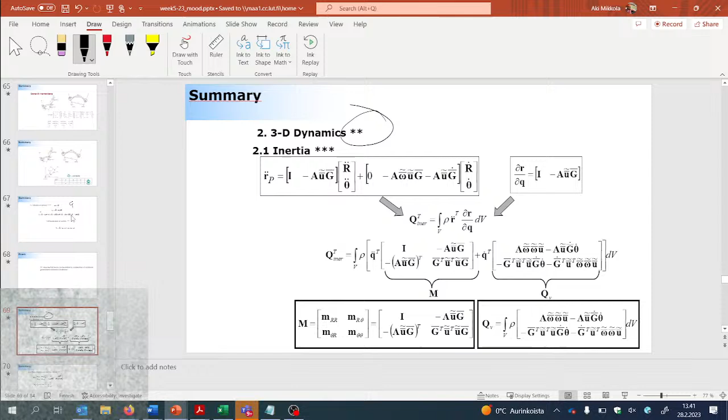Velocity of particle - the only important thing here is this magic T matrix. How the inertia tensor can be related - this is not so important, 2 stars only. Mass matrix and inertia tensor, just 2 stars, so not particularly important. Equation of motion, not important.

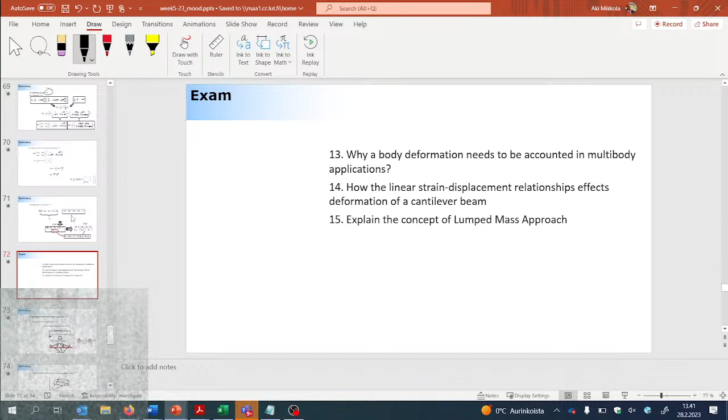But then comes finite element modeling, and finite element modeling is 4 stars. So it is important - make sure you understand the basics of finite element modeling. Floating frame reference formulation, the basics, 4 stars. Finite element method, 4 stars. Shape functions, 5 stars. Solution techniques, 5 stars.

Modal reduction - 10 million stars. So that's very, very important. Modal reduction - make sure you master that.

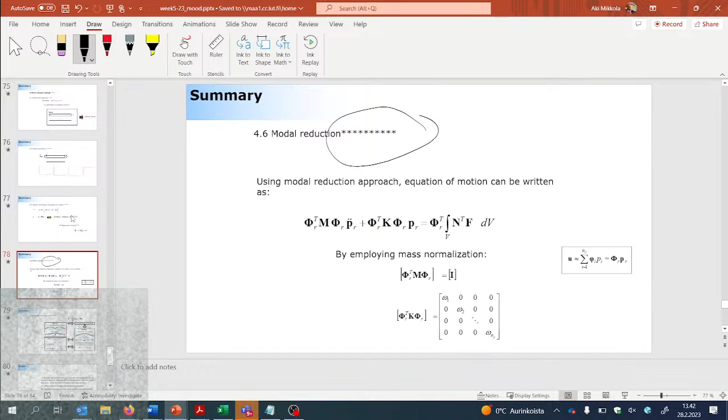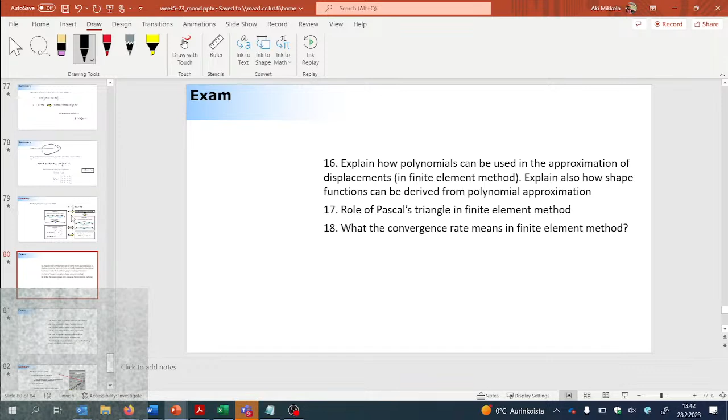Craig-Bampton was something we were not able to cover. Convergence rate, I think you know all this stuff. Mass normalization, reference condition was something we did not cover.

Everything else - so 24 questions in total. Can you think that you can handle it? 28. Yeah, but it should be 24 only.

Because the rest, this mode selection, we did not have time to cover this. Oh, we did, we did - this 26 was okay. This is not okay, 27 is off. This 28 is off. Okay, so let me take myself back here.

25th plus 26th, so 25 questions in total. Now in the voting there may be more, because Suraj was not aware that I'm so slow. That's why. Okay, here it is.

Here comes the most important thing: can-do attitude, can-do attitude. That's why Euler or Newton or other big names are not so important for us, but Elvis, because of the can-do attitude, that's more important and more valuable than any of the stuff introduced by these big scientists. So follow the attitude of Elvis. Can-do.

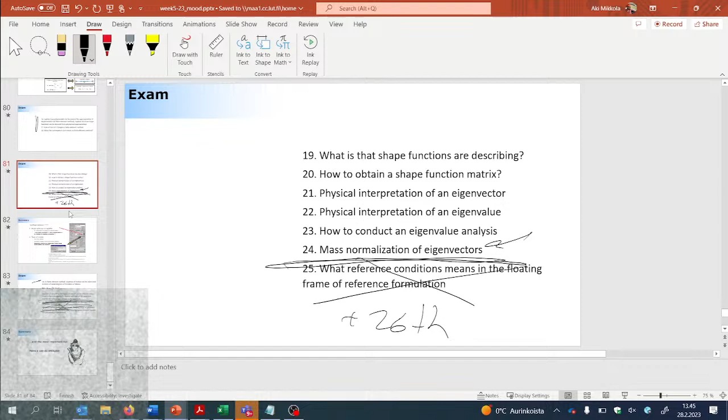Okay, so this is still a guessing game about the success rate. That game is off.

What else? Oh yeah, I was about to say, I'm not going to be here next week - I will, of course, be here, but no lectures next week. And if I'm right, then we're going to have a different schedule next period, period number 4, so it's no longer from noon to 2.

But something else - can you figure it out? What is it? Is it from 1 to 3, or... okay, look at that, I'm sure you can find it out yourselves. So is it from 2 to 4, or 1 to 3, or... okay. Bicycle dynamics - forget about bicycle dynamics, no questions from bicycle dynamics this exam.

But there will be more visiting lectures, and they will actually introduce the questions for the next midterm exam. Okay, and have fun. See you not next week, but 2 weeks from now. All right.